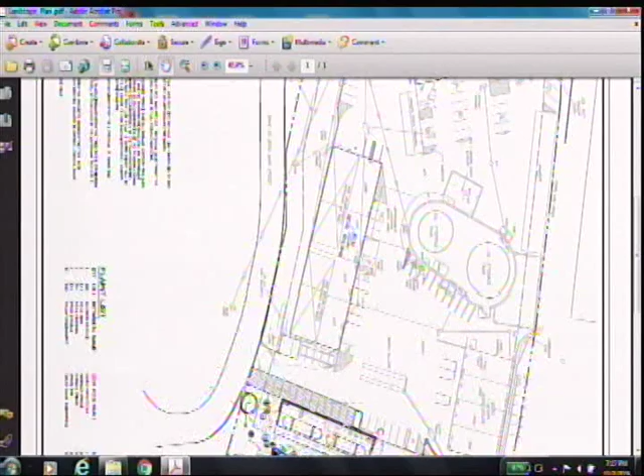What we're proposing, and Kate Throckmorton from ELS is here with me this evening, she'll get into what has been proposed as a replacement buffer in this area, to be located at the top of the embankment. We are proposing a replacement buffer here, which will be planted and mature in the future.

We are proposing a couple of other modifications along with this application. In the previous application, at the end of this is a concrete pad where the propane trucks pull up to be fueled. In order to create a demarcation, a separation point between the parking area and the propane loading, we had proposed, and the commission approved, a small landscape island here.

When we looked at it operationally, with the benefit of the people actually constructing the terminal, who've built tens of, maybe 50 of these, they said operationally that having a landscape island right in this area is not a good idea. So we've relocated that landscape island to this area here.

Another thing that changed, which had nothing to do with the actual propane terminal, was a small septic system located here that served one toilet in the building. It was decided in the process that it would be a lot easier to eliminate that toilet, which also eliminated the septic system in this area.

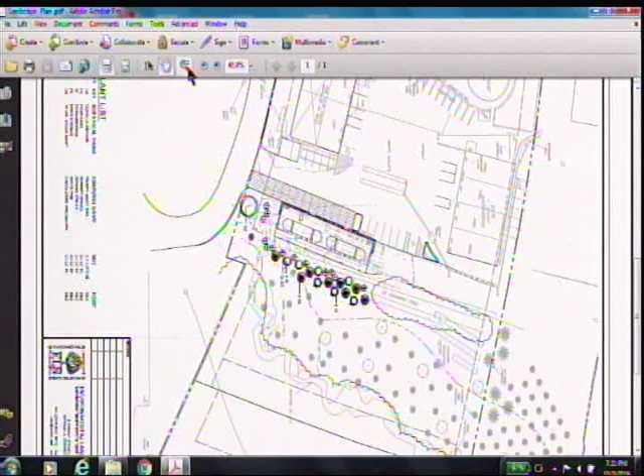Dave, I just want to correct one thing. You said that the landscape island that was here, you relocated here. Yes. This actually is the island that was in the approved plan. There was one here, and there was one here already. You're correct, yes. So it just got removed. It didn't get moved, right? Yeah.

Good evening. For the record, Kate Throckmorton, licensed landscape architect with Environmental Land Solutions. We prepared the buffer plan to replace the trees that were unauthorized and came down, as Dave had noted.

The plan itself includes the planting of 26 trees, 25 of these are evergreen with one shade tree along the road. They include native and non-native species at this point. We also have some general verbal comments that we got back to respond to the staff.

I know there was some concern whether these trees were structurally compromised. There was no physical damage to these trees, but the concern could have been about wind throw for newly exposed trees not used to wind stresses. This is certainly a possibility, and there's no real way to evaluate that. Wind gusts can be very random, but those trees could potentially be at a bit higher risk. The only way to provide some buffer is to divert any direct wind gusts at the exposed trees, and I think this plan addresses that.

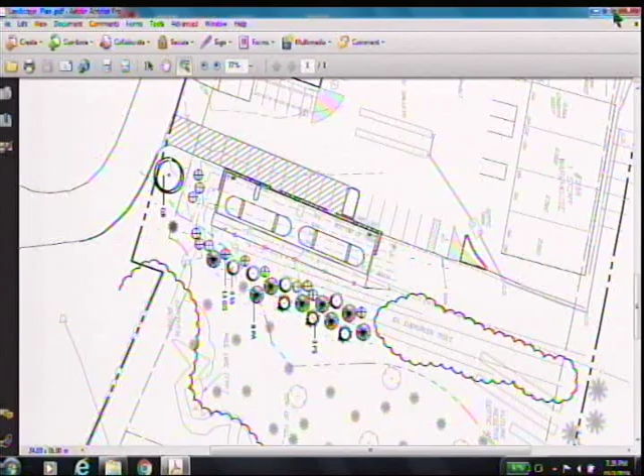As said previously, this is the low point. This is an existing parking lot that's been here a long time. Everything drains to this point here, where we had proposed a catch basin. There had been a catch basin there previously; it had been removed because it was in conflict with the health code and the septic system. So the design we proposed, with a concrete pad here for the dumpster, was to let the water track down, and then beyond the concrete curb there's the concrete pad and a bituminous curb, so the water tracks behind that. This area is almost dead level, and it tracks behind that.

We've opened up a gap behind the proposed planting island to get into the catch basin there. The catch basin is then going to have two features: one, we're going to use the old leaching galleys from the septic system after the tank is removed, which will serve as the overflow. Initially, it's going to go into the old leaching galleys and provide groundwater recharge.

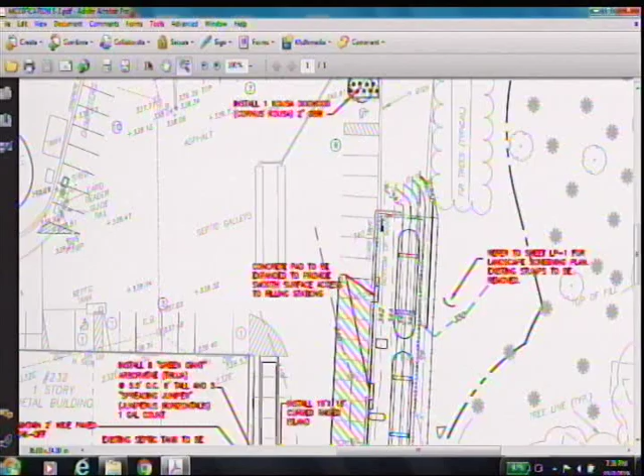The only reason we have those three spaces in front of the tank, and that the concrete pad doesn't go all the way, is because we needed parking. We needed to find parking. We're right at the bare minimum.

The other issue is just snow plowing. We want to be able to just plow the whole thing parallel. We can't plow up against the fence or the terminal. It would be incredibly inconvenient for that. It would just be in the way. Putting bollards or a curb there is about as inconvenient as you can get.

We have other parking all over the site that's perpendicular. We have vehicles up to each other, up to the buildings. There's no need for protection. I mean, we're responsible for the safe parking on this lot, and on a practical basis, we won't be parking any vehicle in those three spaces.

It's there for our parking count, and we ideally would not like to have it. But as far as having it open and being able to plow it and get access, it just works way better than having any obstruction there. And the designer of the terminal agrees with us. It's just something we didn't pay attention to when it came up. So that is our request.

Okay, thank you. I believe that was the engineering comments.

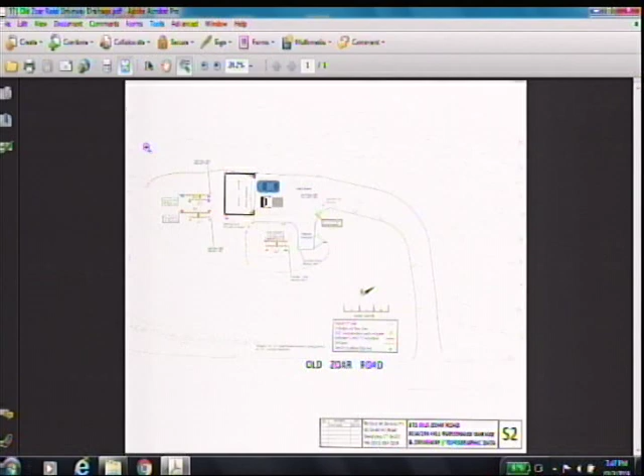First up, let's talk about the garage. SCP 2019-09, file number 16198, 371 Old Zoar Road. They came back to us tonight because they had to notice some additional neighbors. That was done. They had some issues with the drainage that the town engineer was concerned about. That is being worked out with the engineer. Is that correct, Paul? Yeah, Scott's been working with him back and forth a little bit, and I think that's where they got to these drainage ways they proposed, and Scott said he's just about done.

Nothing different. All right, so anything that's still up in the air with that will be resolved between the applicant and staff. I don't believe there were any other issues concerning that, were there? I had some just housekeeping items which they represented at the hearing that they had done, but we haven't really got a revised plan to do that, so I would just put that in the approval for confirmation that they've addressed those items. Okay. Anybody have anything else on this that's raising a flag?

What's our motion? We make a motion to draft approval of the letter, with the conditions. Okay, we'll work up that approval letter based on those few remaining items.

SCP 2018-10-A1, file number 16058, 232, 231, 236 Main Street. This is the application that we just heard. There were a couple of issues here that I think the commission needs to discuss and make a determination on. The first being the request to remove the parking island at the end of the truck loading area.

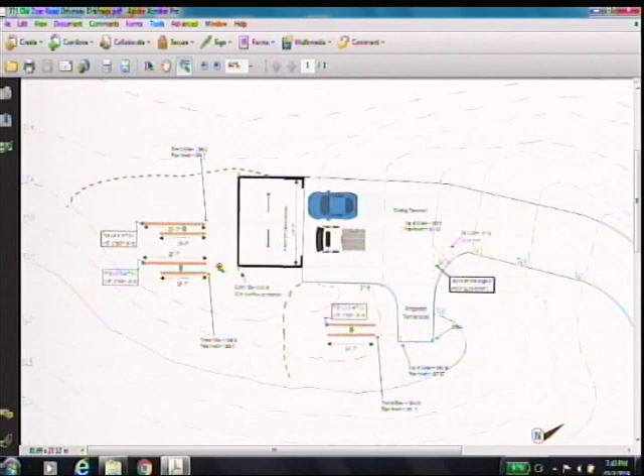Where are they with the percentage of pavement and stuff? Is removing that island really going to matter? They're way over, they've been way over forever, they have a ton of pavement. That island was part of the original approval - getting that island was twofold, it was getting some green space plus separating. I definitely understand how that can be in the way, if you want trucks coming straight in as opposed to kind of getting in and then backing up to it.

Well, then they shouldn't be parking spaces, right? I know, but they need the parking spaces, because they do need the parking spaces. I know, but that little spot of green isn't going to change the fact that they're way over. Does it make sense on their parking lot anyway to put that green spot, maybe eliminate 3 or 4 spaces? That's what I was wondering. Put it next to the handicap spot. They already have one, though. Put it on the other side.

They're at their minimum, so in lieu of that, give us a little green space. Well, they're gaining back a parking space by getting rid of the island. So take away another parking space, turn it into an island further up, a couple spaces up, everyone's happy. Same size, just shifted up so it's not in their way. Or the one at the end, you make bigger to take over a parking space. Well, that's a handicap spot next to it, so you can't.

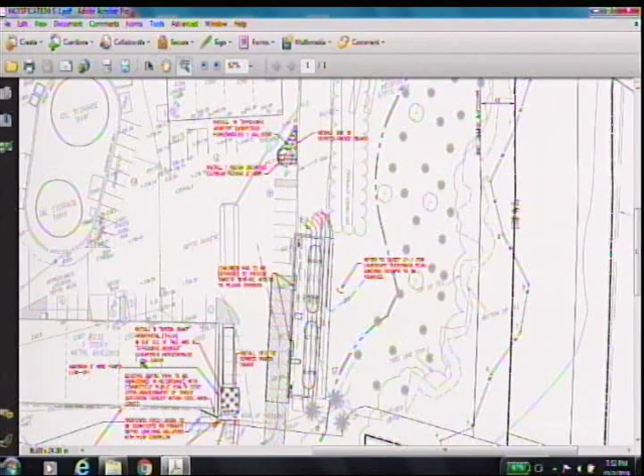But did they put that green space up there now? Did we just put that on the plan up top there? I think it got bigger. I think the other one just got bigger. So they did expand it - they didn't remove it, they moved it. And that's fine, I'm okay with that. So the question I am presenting to the commission: the applicant is requesting to eliminate the island at the end of the loading path.

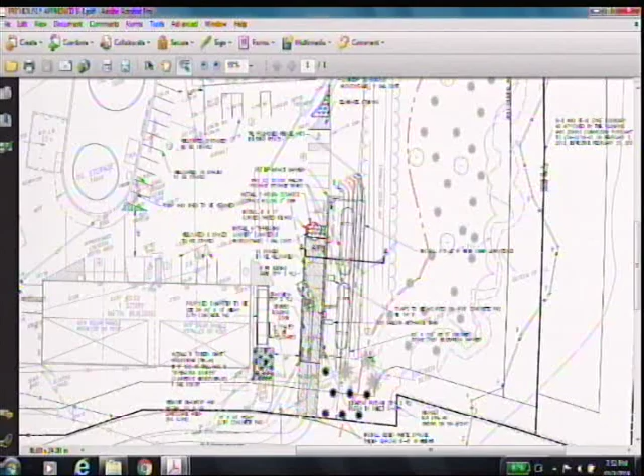Yes or no? Yes. Yes, as long as you lose it up there. Yeah, see, they - I don't know what, yeah, I know, captured that area, I guess. Whatever that was, so we're gaining some on top. The majority of the commission is saying yes, so that issue is resolved. So, next issue.

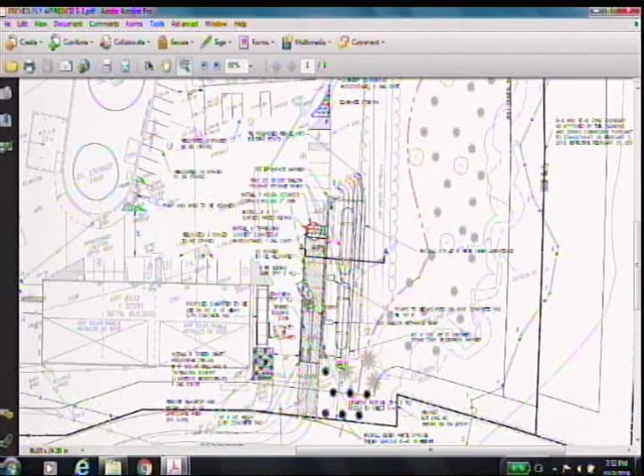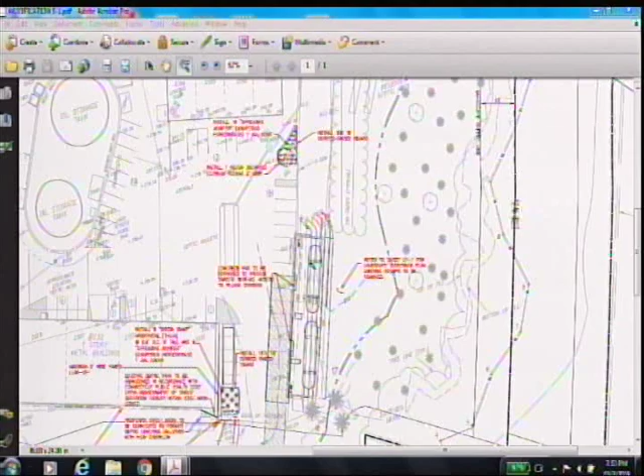Down at the southeast corner of the storage building, they have that island. This was originally going to be an uncurbed planting area where surface flow was going to go into it and be kind of like a rain garden. Now they're proposing to curb that and put in a catch basin there. Will and Scott are saying that they're concerned about that little gully through there getting blocked and being a maintenance issue. The engineer's concern is if he moves that catch basin to the right, where it says edge of pavement, he's concerned about the cross slope on that driveway where the trucks are gonna be driving in. According to his calculations, it's gonna go from a 4% to an 8% slope. So he's requested to leave the catch basin where it's shown on the drawing.

Is the staff concerned about that gap there between the island, or is it the location of the catch basin? It's these two gaps that create these little areas which get freezing ice and get leaves and garbage. Does that gap really need to be there? Well, it's to get the water to go here - otherwise, if that's the low point, the water's gonna go where it needs to. The water from the pad has to get between the building and the plant.

Well, does it really need to be diverted around it? You put a pipe under it? Because you'd need to grade it properly, and it would need a little bit of a drop. I don't understand the 8%. Maybe you can expand it - if there's 4% here. His concern is where that basin is located now; he would have to get that water going back east to get into that basin.

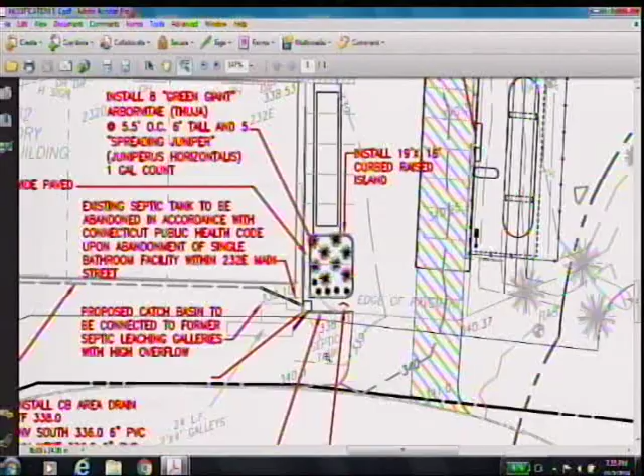What if he leaves that one there, moves that island, moves that curb up against the building, and then puts another one in that top left corner, and pipes it to the other one?

I don't want to put two catch basins. Well, there's a lot of things I don't want to do either, but they get done. Yeah, but that corner - if you just raise that corner a little bit, the water will flow around. I know, but you're asking it to go up, down, and around. I don't have a problem with this design.

The only thing is, if there's a concern about that passageway getting clogged, make it a foot wider. Is it the bottom passageway or the one up? Between the planter and the building. So that's the passage you're worried about getting clogged?

It's going to eliminate more of the green though, if you do that, right? I'm just saying. We're going to do that. You've already lost all that, so you're making it even smaller. I don't know - are you concerned about the passageway getting clogged, or the gully getting clogged?

What's the difference? Well, I mean the drain - the catch basin itself. I don't know, this just isn't the best design to me. It's heavy maintenance, and everything's going to collect in here - even if you make it a foot wider, it's going to collect anyway.

The fact that they're using the existing abandoned galleries to recharge groundwater - whether they add green space to recharge the groundwater, or they now tie into a gallery system, they're accomplishing the same goal. They're eliminating some of the runoff. So I think in the end, it all evens out.

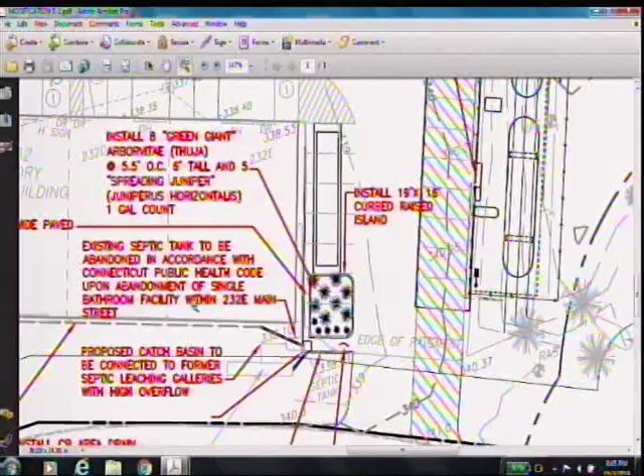I don't know, I nominate me and Leon. Seeing we only have one full-time Democrat on the commission, that kind of fills that slot. So Leon, good job, I'm willing to team up with you. But Michael is not here, and I do want to get his input on it. I will nominate myself, and if it works out, great, if not, we'll go from there. He is big on conservation. Oh yeah, he is really good for that. You know what, you and Michael will do a better job than me. Michael will do a good job. Michael, you're going to be great with him. But it all depends, well let's leave it open then, being Democrat.

When is this thing going to be formed? I don't know. I got this email last week.

I'm sure they're not going to do this tomorrow, probably after the election. No, I don't think so, they're gonna wait till it's before the election. It'll definitely be before. How would they wait a month? They won't wait 20 years to do it.

There are 3 or 4 positions on planning and zoning, and there are 3 or 4 people running for planning and zoning, so it's a pretty safe bet that everybody running is gonna get elected. You just have to vote for yourself. You can't lose, you're all set. I'm worried about this one, I'm writing in Paul over Bruno.

It would be very hard to lose this election. Even you can't lose, Bruno. The only way you could lose is if absolutely no one in town votes, or if you forget to vote for yourself. Zero, that's the only way you lose. I promise you, I will vote for myself.

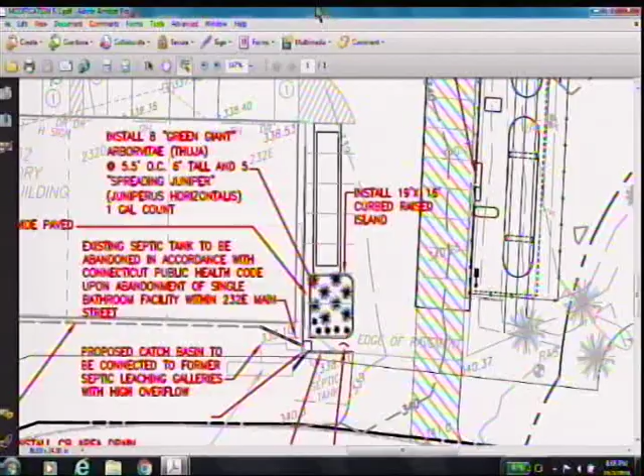I'm gonna reach out to Michael and see if he has interest in this, and then we'll readdress this. But thank you for stepping up. I will step up for the team.

Plus I get to hang out more with Leon. That's moving on, chairman's report.

POCD is rapidly approaching. You're a lame duck, you're a short-term guy, that's right, doesn't interest me. You could not be Paul.

You gotta show up, want dedication, want attendance. I'm here more than Bruno. Why does it always come back to me? That is true, thank you. I just don't understand why it always comes back to me. All right, I'm like the punching bag of planning and zoning today.

We are going to be setting up our preliminary meeting sometime in the month of October, I would imagine. It's either gonna be the last week of October or the first week of November, because I know he's on vacation. We'd have to do it next week if he's gonna do it in October, because he's on vacation from the 17th to the next week after. Francisco? Yeah. So it'll be either the last week of October or the first week of November. We'll get that date firmed up with the consultant.